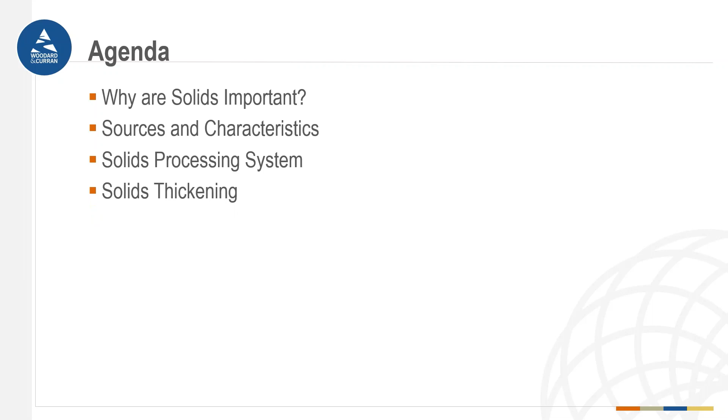So let's get started. The agenda for Module 1 is: first we're going to talk about why solids are important. We're going to talk about their sources and characteristics. We're going to talk about solids processing systems in general, and one specific part of the solids processing system, solids thickening.

So why are solids important? Wastewater treatment creates two things: clean water and solids, otherwise known as biosolids, residuals, or sludge. I may end up calling this all three of these things today, so these are all terms that mean the same thing. As long as wastewater is flowing to your plant, you're making solids, and you have to remove what you make.

Disposal of solids can be a major part of your annual operating expenses. And processing solids can be very O&M intensive and can be a big portion of how operators at your plant spend their time.

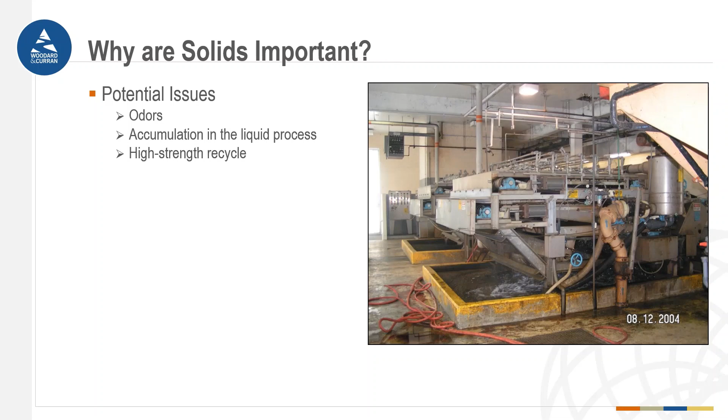Solids are also important because they can cause potential issues such as odors. If allowed to accumulate in the liquid process too much, they can cause process upsets. And if the solids processing system isn't working well, you can recycle solids and dissolved material back to the liquid process.

Because of these issues, solids can be the tail that wags the dog at your plant. Problems with your solids handling can cause problems on the liquid treatment side and even lead to permit violations.

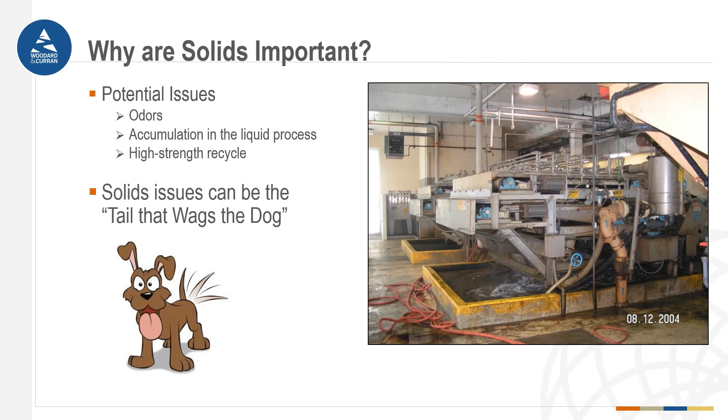In addition to being a potential source of issues, solids handling also presents an opportunity. It's one of the places where operators can make the most impact. Improvements to the solids handling process can simplify operations, save money, and even improve the liquid process.

And for operators who are feeling particularly creative and entrepreneurial, there are additional opportunities. Biosolids can be used as a fuel. It can be turned into a gas or pellets and burned. Solids can be digested to make heat and electricity. And solids can also be used as fertilizer and organic material for soil restoration.

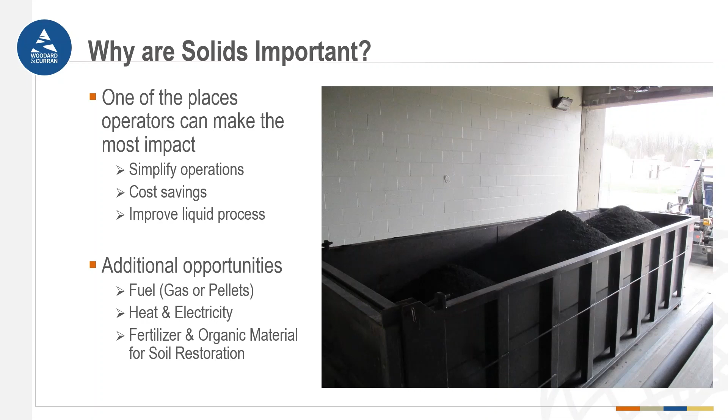Where do solids come from? Even though these things here look like UFOs, solids do not come from outer space. These are actually primary clarifiers, which is one possible source for solids.

Most plants also have secondary clarifiers, which is another source for solids. Solids can also come from your tertiary process if you have one. These solids can be metal salts that were added for phosphorus removal, or solids produced from effluent filters. And septage and hauled wastes can also be sources of solids.

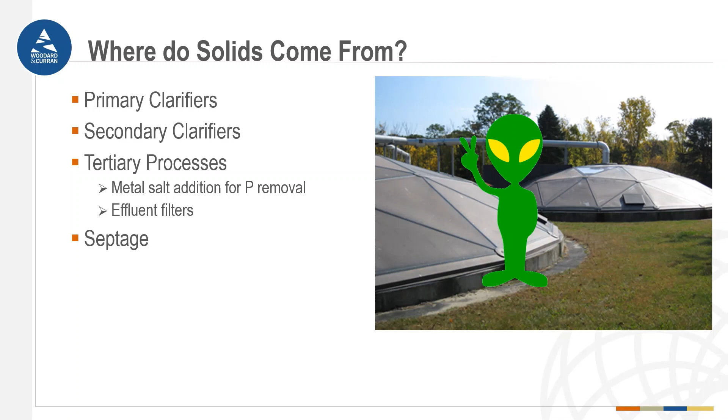The characteristics of solids depend on where they've come from. If your plant has primary clarifiers, the primary solids are typically 1 to 6% solids. They are the organic and inorganic material that's not removed by the headworks. It's relatively heavy, gritty, and potentially high BOD, and also contains fibrous material.

The secondary solids, on the other hand, are less dense. They're only about 0.5 to 1.5% solids. Secondary solids are the microorganisms grown in secondary treatment to remove BOD. They're cleaner, less odorous than primary solids. As I mentioned, they're lower density. They also tend to be biologically active, especially for plants with low SRTs.

Tertiary solids, if your plant has it, are very variable. As I mentioned before, these consist of metal salts. They can also be backwashed from effluent filters. Tertiary solids are typically poor settling and difficult to thicken and dewater.

Septage is typically 1.5%. Septage received from residential sources is usually cleaner than commercial, but use caution because depending on where your septage is coming from, it can contain rocks and other debris.

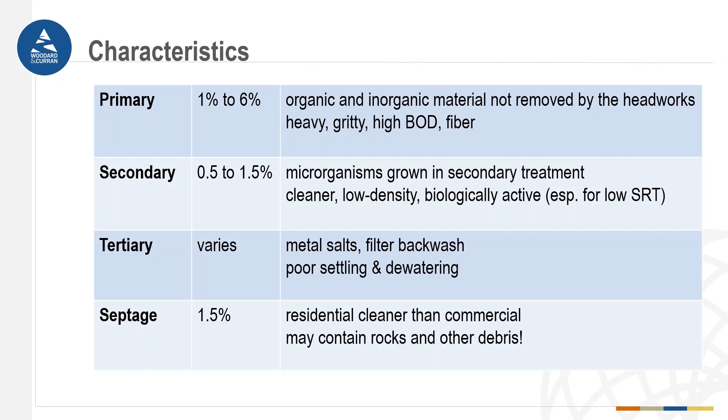For example, in Lowell, Massachusetts, at the Lowell Regional Wastewater Utility, they send their primary sludge to a cyclone degritter. In order for this to work, they have to pump at a high rate, so their primary sludge is relatively thin. By contrast, at smaller plants that don't have primary clarifiers, the material that would have ended up in the primary sludge ends up in the secondary sludge.

So the secondary sludge is relatively dense, and this is the case for a lot of small plants in Maine, including the plant at Madawaska, that don't have primary clarifiers. Different types of secondary processes also produce different secondary sludges. At Greater Augusta Utility District, for example, they use a high purity oxygen process.

And then sludges can be different too, depending on the point in the solids handling process. For example, at the Lewiston and Auburn plant, they have gravity thickeners, and the primary sludge is different going into the gravity thickener than it is coming out.

A few final points on characteristics to watch out for. Sludge, particularly primary sludge in a plant that doesn't have grit removal, or secondary sludge in a plant that doesn't have grit removal or primaries, can contain a lot of grit. That's what this picture shows, grit that was in primary sludge at a large plant with an old collection system and failing sewers. So a lot of that material ends up in the sewers and comes out in the primary sludge. And this grit is so large, it's almost gravel-like.

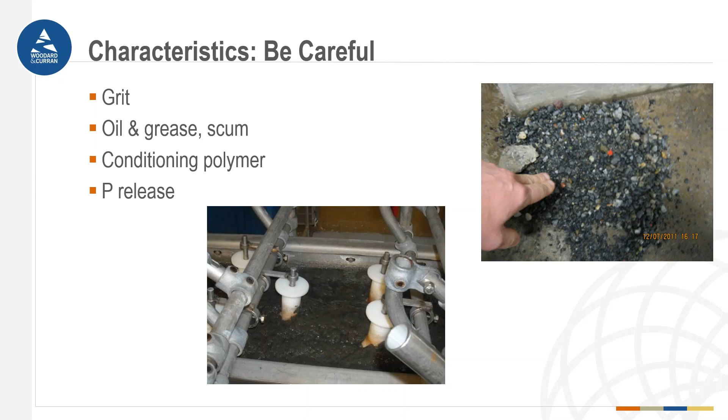Of course, it all starts with the source of the solids, either primary, secondary, or other solids, hauled waste or septage. Primary solids often undergo some kind of preliminary treatment to take out that grit. You can have grinders or screens. Secondary solids is often stored first, usually in some kind of aerated storage tank.

And then the first process that's applied to these is thickening. The goal of thickening is to remove water and increase your solids concentration to about 6%. By doing this, you greatly reduce the volume of the sludge that you're trying to process, so you can reduce the size of downstream equipment and reduce the amount of hauling that you've got to do.

Some plants have separate thickening for their primary and secondary sludges. In some plants, the secondary sludge is blended with the primary and they're thickened together. In small plants, thickening might be as far as your sludge handling system goes. At that point, you pump it onto a truck and it's sent off to ultimate disposal.

Some plants have additional steps, such as dewatering. The goal of dewatering is to remove even more water and concentrate your sludge up to 20 to 30% solids, reducing its volume even more.

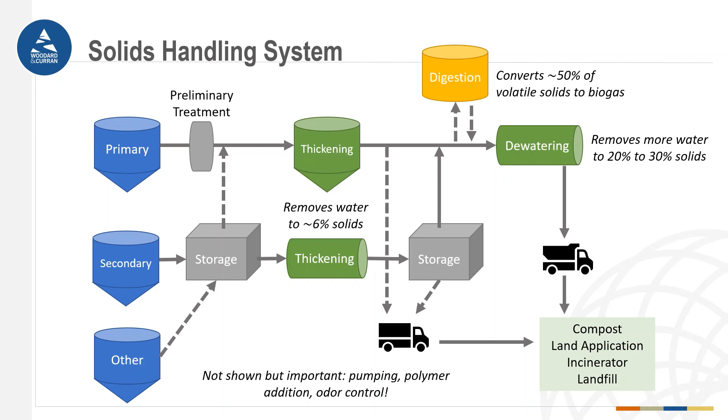One final point, I don't show pumps on this diagram just for simplicity, but pumping is a really important part of sludge handling that'll be talked about in a later module. Piping is also important, as is polymer addition and odor control.

Just briefly, I mentioned preliminary treatment on the previous slide as often the first process for handling primary sludge, basically taking out the debris, the grit, the stringy material that can be in that sludge.

The most common preliminary treatment step is grinding. This picture here is the kind of grinder that you might see on primary sludge piping. Some plants that don't have grit removal on their forward flow, particularly larger plants, the grit will end up in the primary sludge, so they actually have a grit removal system on the primary sludge. The benefit of this is the grit removal system can be smaller and the grit is more concentrated at this point.

Another preliminary treatment step, which isn't very common but does exist, is screening. This picture here shows inline screening of primary sludge.

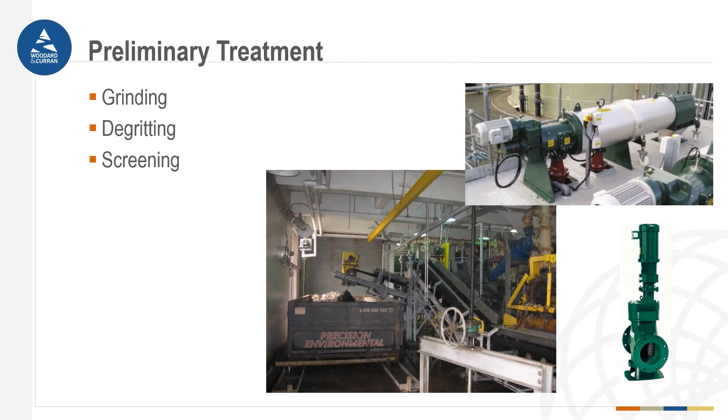I'm going to spend a little bit of time talking about thickening. This is a fairly important step. Most plants that handle sludge at least have thickening. The goal of thickening, again, is to remove water to reduce the volume of sludge.

For example, if your sludge is 2% and you can thicken it to 6%, you've reduced its volume by 3 times. That means you can truck only a third as much as you'd have to if you didn't thicken it. Thickening makes the sludge easier to store, haul, and process.

There are a number of common technologies used for thickening: gravity thickeners, rotary drum thickeners, gravity belt thickeners, dissolved air flotation thickeners, and centrifuges. I'll talk a little bit more about each of those now.

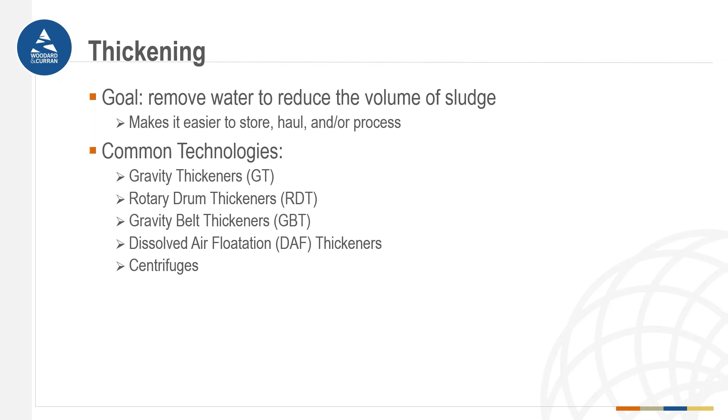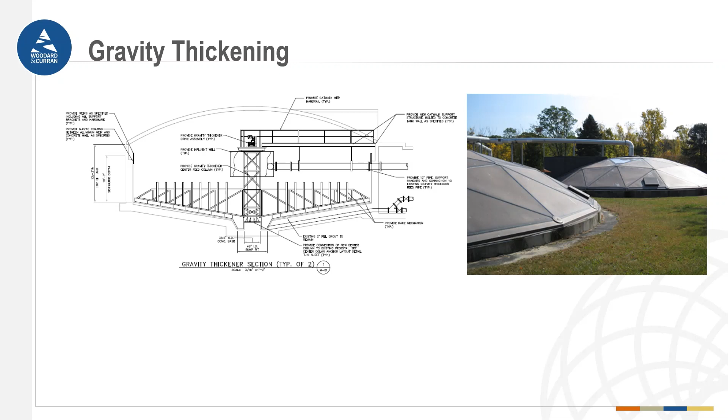Gravity thickening is perhaps the simplest process. Sludge is introduced into the center of a large tank, such as this, and it's just given time to settle out. The sludge concentrates on the bottom and clean water flows off the top. One thing to note is the slowly rotating sludge collection mechanism, which pushes sludge toward the center. It also has these tines or rakes, the purpose of which is to carve grooves in the mat of sludge.

Rotary drum thickening is another very common type of sludge thickening. It's also referred to as rotary screen or rotary sludge thickening, so you'll see RST as well. RST, RDT, all these terms mean exactly the same thing. Rotary drum thickening is common in smaller plants, especially plants that just have a single sludge.

Gravity belt thickening is similar in that it's another low speed, fairly easy to operate process. It's not as easy to enclose as a drum thickener, so these gravity belt thickeners can be a little bit messier and a little bit more odorous. The way these work is that the sludge is dumped on one end of the belt. These typically don't have a separate flocculation tank because the belt has a zone up front to allow flocculation to occur. The belt moves along slowly and is made out of a perforated mesh, so water drains through and the sludge is conveyed across the top.

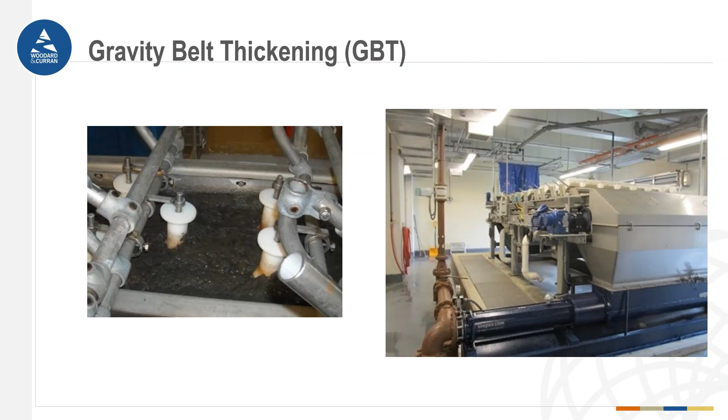Dissolved air flotation thickening is another type of thickening. It's a little less common in municipal plants. It's used for sludges that tend to want to float anyway—things like secondary sludge that's kind of neutrally buoyant, or secondary sludge mixed with scum that does tend to float. It's also common in industrial processes, especially food processing, where there may be a lot of grease involved.

The way this works is there's a recirculation pump, which recirculates liquid in the tank. It's a high pressure pump that pressurizes the liquid, and air is injected into that pressurized liquid. It's then introduced to the influent end of the DAF thickener. The pressure is released and it's mixed with the sludge.

They are sometimes used on a blend of primary and secondary sludge, but in this case they should be used with caution because the primary sludge contains a lot of BOD and the secondary sludge contains active microorganisms. When you mix those two things together, you get a lot of biological activity, which can lead to odors and basically can digest the sludge and release organic material back into your liquid stream, causing upsets.

Rotary drum thickeners are commonly used on secondary sludge or in plants with no primaries, where secondary sludge is essentially a blend of primary and secondary. As mentioned, they require flocculation and polymer. They're common in small plants with a single sludge, and it's a simple process that's easily enclosed.

Belt thickeners are similar in that they're typically used on secondary sludge or a blend. They're a mechanical process, so they require flocculation and polymer as well. They can be a little messier.

Dissolved air thickening is used on secondary sludges, also on a blend of secondary and scum. It's good for materials that tend to float anyway and contain scum and grease. They're large and complex and not really common in a municipal setting.

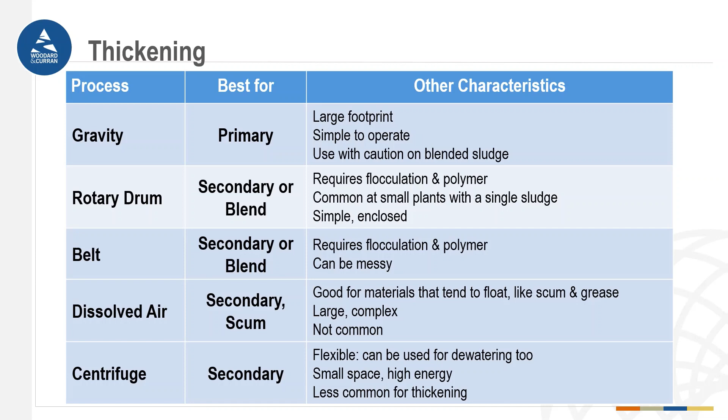The last slide of Module 1 that I want to go through is blending. In some plants that have multiple sludges, there are points in the process where the sludge needs to be blended. This is important ahead of thickening or dewatering to have a consistent sludge so that those processes run well.

The best way to do blending is in a blend tank. If you have the luxury of that at your plant, you send the two sludges to the blend tank, they're mixed with a mechanical mixer, and the blended sludge is pumped to thickening or dewatering.

Inline blending also works well. This is when the two sludges are just blended together within a pipe. Often a mixing valve is added to promote turbulence and mixing within the pipe, and this is typically how sludge is blended ahead of gravity thickeners.

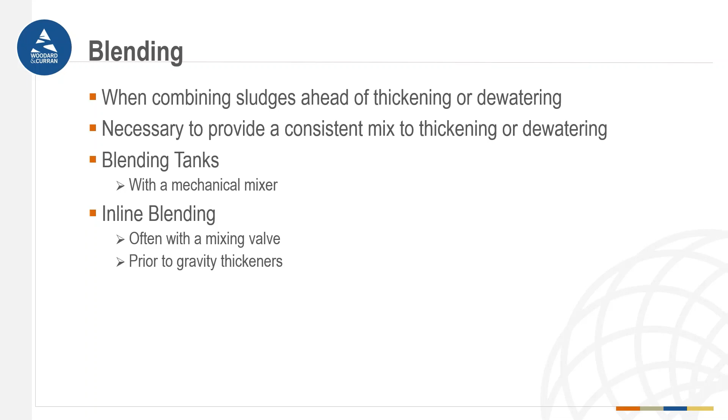That's the end of Module 1.

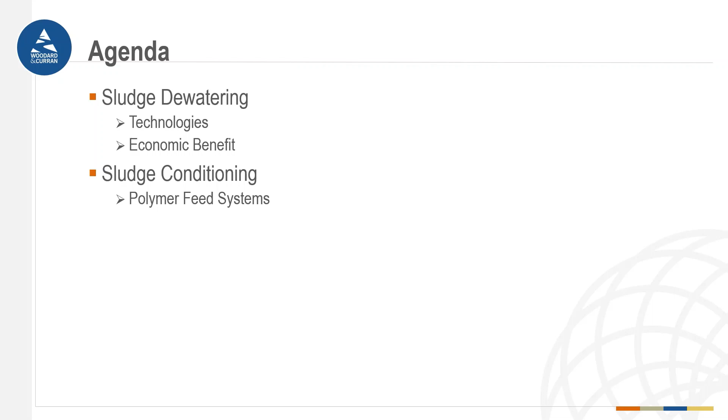Our first topic for this section is a discussion of sludge dewatering. The goal of both sludge thickening and sludge dewatering is to remove water from the sludge, because the more water you remove, the less weight you have to dispose of. The main difference between thickening and dewatering is that dewatering technologies remove more water than thickening technologies.

The first technology we'll go over is the screw press. This equipment is typically comprised of a screw that slowly rotates within a stationary screen basket. As the screw rotates, sludge travels along the screw and is pressed against the screen. Water passes through the screen and exits the bottom of the screw press as filtrate. The dewatered sludge is discharged from a chute at the end of the screw. Screw presses are enclosed within a solid housing to contain odors and splashing that may occur from the spray bar that's aimed at the screen.

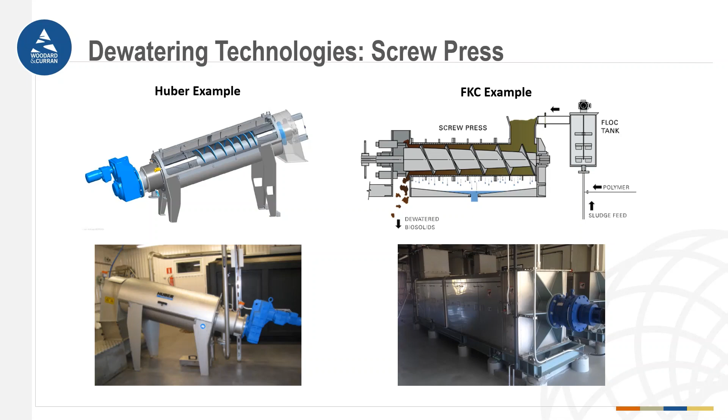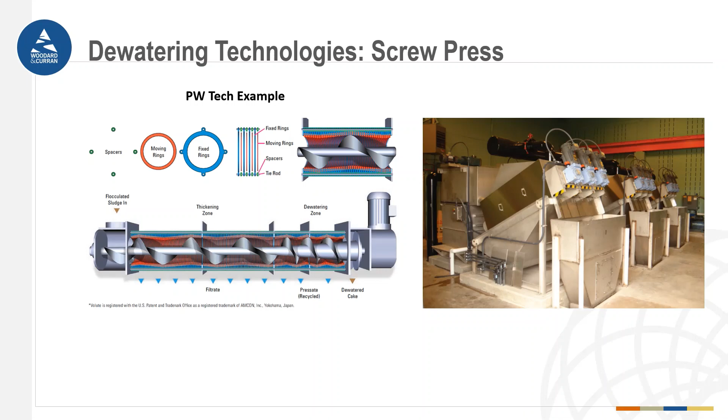This slide shows an example of 2 manufacturers that utilize this principle. This next slide shows an example of a manufacturer that has slightly modified the traditional screw press method. Instead of pressing the screw against a screen basket, PW Tech uses a series of rings around the screw that alternate between fixed rings and rings that are allowed to move up and down as the screw flights rotate.

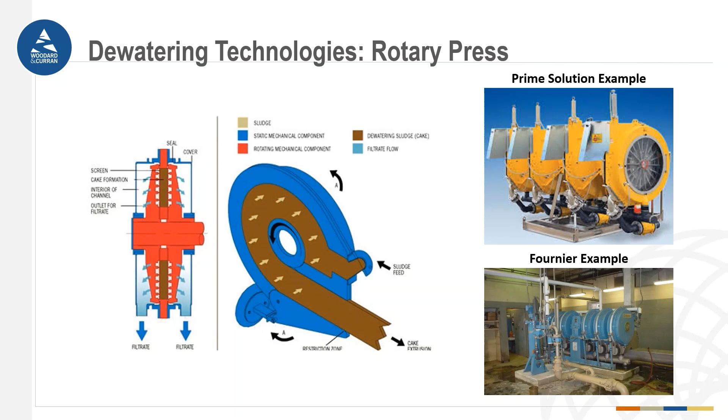The next technology is a rotary press, which consists of a modular series of filtration units. Each unit is composed of two parallel screen plates that rotate at a low speed. Sludge is fed into the space between the two plates. As the plates rotate, water is pressed out through the screens and the dewatered sludge is transported to the outlet. The sludge processing capacity of the rotary press can be increased by adding more filtration units. Similar to the screw press, each filtration unit is enclosed within a solid housing to contain odors and spray water.

The centrifuge might look similar to the screw press we just discussed, but the only real similarity is that they both utilize screws. In a centrifuge, the rotating screw is enclosed within a solid bowl that rotates at a very high speed. This causes the sludge to separate into a dense sludge cake and water. These units are also enclosed within a solid housing to capture odors and spray water.

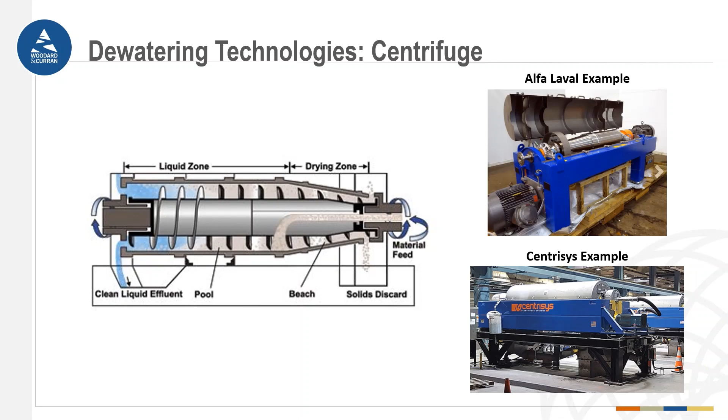Belt filter presses are a bit of a different animal. In this process, sludge is fed onto a porous belt where it's thickened slightly in what's called the gravity drainage zone. Pressure is then applied to the sludge from above by a second belt in the low pressure or wedge zone. Then in the high pressure zone, the top and bottom belts are passed around a series of rollers that squeeze additional water out of the sludge before the cake is discharged.

As you can see in these figures, belt filter presses can come in either a horizontal or a vertical configuration, and the capacity of these units can be increased by just increasing the length of the belt system. Unlike any of the previous three technologies, these units are not enclosed within a housing and are often installed within a dedicated room to contain odors and spray water.

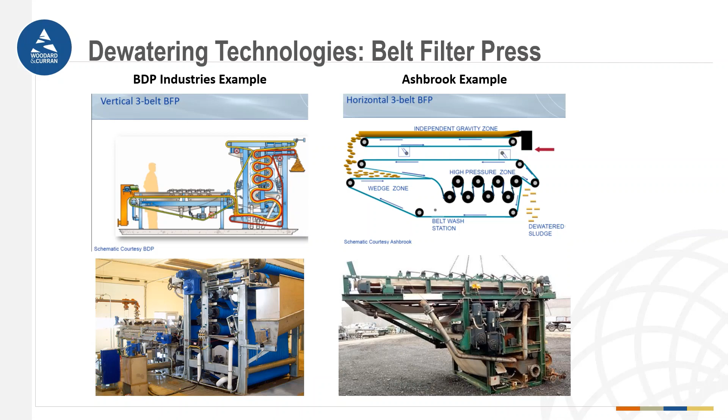On the other hand, the belt filter press is not enclosed, which can create a messy working environment if a separate room or containment area is not included in the design. In terms of electric requirement, the screw press, rotary press, and belt filter press all operate at relatively low speeds and therefore require smaller motors. But the high-speed operation and multiple motors of the centrifuge result in a higher power requirement.

The centrifuge also tends to require a higher polymer dose than the other technologies, which results in a higher overall operating cost when combined with the electrical requirements. However, both the centrifuge and belt press can provide a higher sludge throughput per unit area footprint than the other two, and both are capable of dewatering waste-activated sludge on its own, whereas the screw press and rotary press tend to perform poorly unless the sludge feed consists of a blend of both primary and waste-activated sludge. As you can see, there's really no one technology that will be the answer to every facility's dewatering needs.

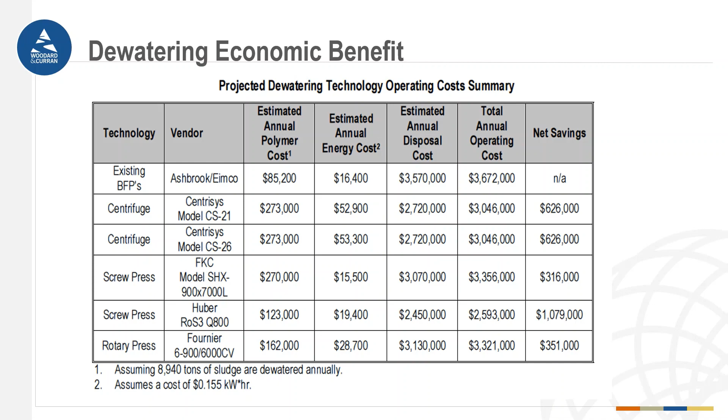In this example, all three of the other technologies would require a higher polymer dose than the existing belt filter presses, but all three would also result in a significantly lower sludge disposal cost because the belt filter press typically doesn't produce as dry of a cake as the others do. The end result of this particular comparison is that replacement of the existing belt filter presses with a Huber screw press would actually result in the greatest operational cost savings.

We're going to continue with the operational cost discussion and zoom in a little closer on the dewatered cake disposal component. As you can see on this example graph, the dewatered sludge volume in wet tons per day that needs to be disposed of decreases exponentially with the dry solids content of the sludge.

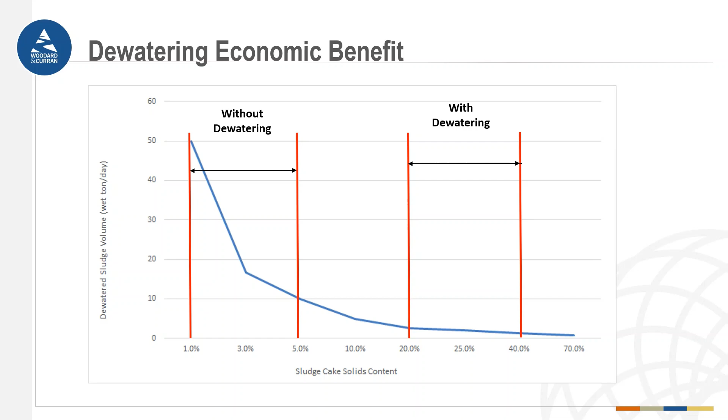Sludge thickening typically results in a cake between 1 and 5% solids, whereas sludge dewatering typically results in a sludge cake between 20 and 40% solids. This means that the sludge volume produced by a dewatering system can be several times lower than that produced by a thickening system alone.

As an example, this next figure shows how about 96,000 gallons of sludge thickened to a solids content of 5% equates to 400 wet tons per day that someone then has to haul away and therefore pay to have hauled away. This is approximately 16 25-ton truckloads per day. If this sludge is then dewatered to a solids content of 20%, the result is just 100 wet tons generated per day, or approximately 4 truckloads.

By contrast, if that same 400 wet tons of 5% thickened sludge is dewatered to a solids content of 30%, only 67 wet tons is generated per day. So that extra 10% solids content in the dewatered sludge represents a savings of a whole truckload of sludge hauled each day over the previous example. You can clearly see how the savings will start to accumulate over just the first year of operation of a dewatering system.

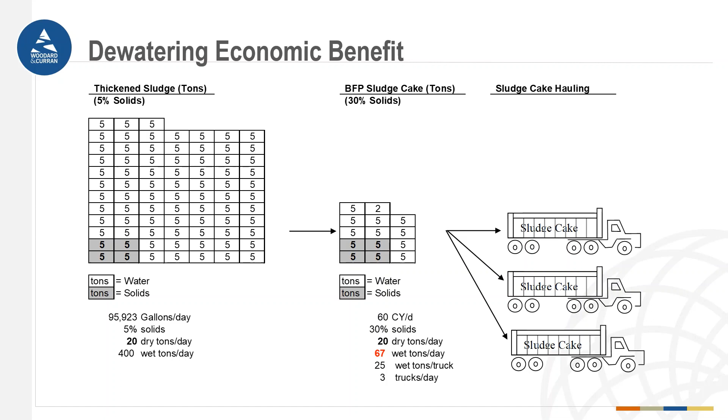At this point, we're going to switch gears a little bit and talk about polymer. I've mentioned polymer several times throughout the module as a substance that is added to the sludge prior to it being fed into the dewatering equipment. The word polymer is a general term that refers to long chains of sticky molecules that bind sludge particles together to form a floc. This makes it easier for the dewatering equipment to effectively separate the solid particles from the liquid water. Sludge primarily has a negative charge, so positively charged or cationic polymers are typically used for flocculation.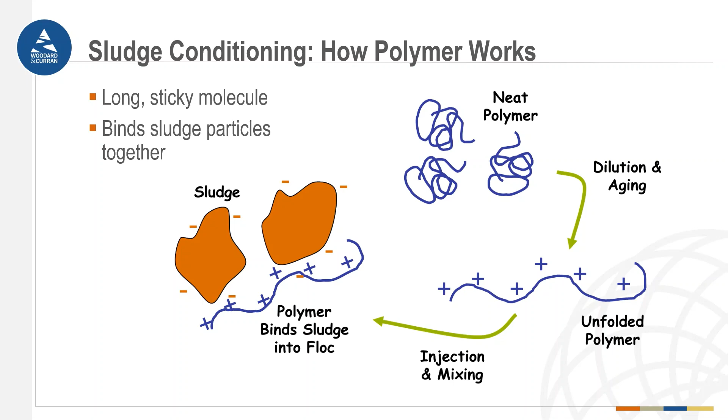There are many different types of polymer available that are based on parameters such as molecular weight, charge density, and percent active content. The first step in designing a polymer feed system is to select a polymer that will result in the highest percent solids in your dewatered cake sludge.

This is typically done by performing a jar test, which allows a side-by-side comparison of how well different polymers form flocs within a mixed sludge sample. The dewatering equipment vendor can also typically perform bench-scale lab testing to determine which polymer will work best with their specific equipment. However, even with a recommendation from the lab, it may be necessary during initial startup of the dewatering equipment to try several different types of polymer before the final selection is made.

The operator can then vary parameters such as makedown concentration and dose to fine-tune how the polymer feed system is ultimately run.

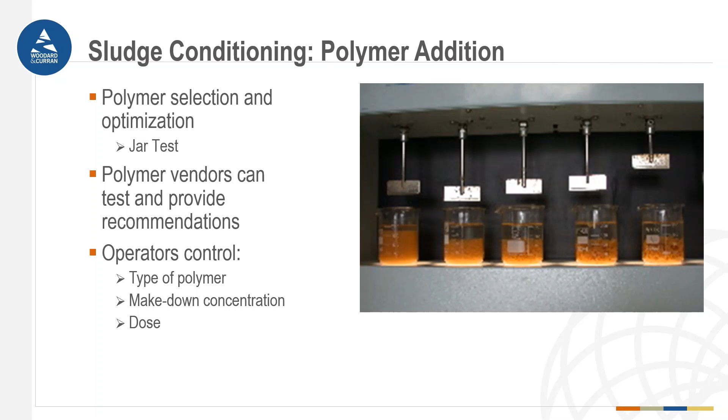The addition of polymer is necessary for all thickening and dewatering technologies. In general, the thickening and dewatering processes often require two different types of polymer, but it's possible at some facilities to actually use the same polymer for both processes. It is therefore recommended that the dewatering polymer be tested on thickened sludge that has had its own polymer added to it already to accurately reflect field conditions. It's also therefore typically necessary to install two separate polymer storage, makedown, and delivery systems.

Design of a polymer feed system begins with the anticipated polymer dose. As I've already mentioned, the exact polymer dose will not be known until the equipment is operational. So this estimated dose is calculated based on the typical range of polymer volume and concentration that depends on the type of dewatering equipment and the type of sludge cake. In reality, the polymer dose will vary based on sludge quality and other impacts such as wet weather and seasonal variation.

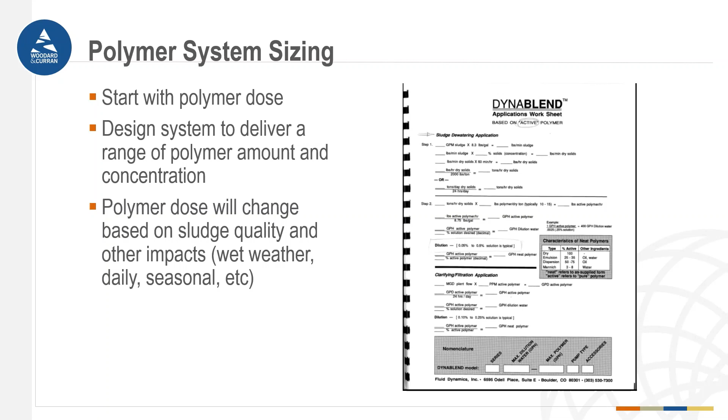This figure provides an example of a facility that requires different polymer feed systems for thickening and dewatering. Each system requires its own bulk storage tank, mixing pump, blending unit, aging tank, polymer pumps, and injection system.

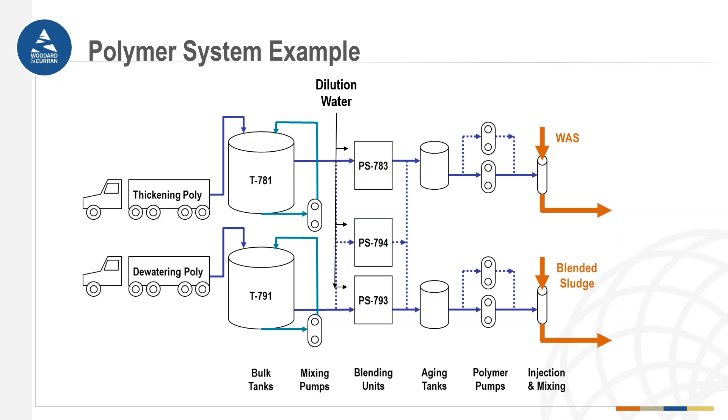This last slide shows just a few photos of the polymer system at the LAWPCA facility where this training was originally scheduled to be held. Although polymer is chemically inert and non-corrosive, there are containment curbs around the storage and feed system areas to prevent spills, since polymer is a very slippery compound that can lead to operator slips and falls.

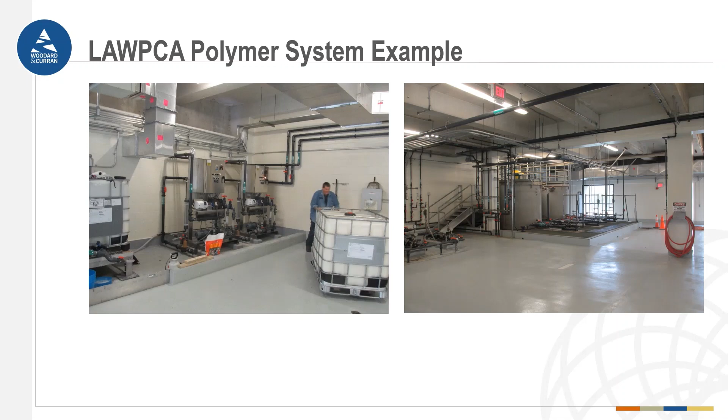Thank you very much, Julianne. Now we're going to start Module 3 of Introduction to Wastewater Solids Handling. My name is Tom Harrer. I'm a project engineer at Woodard & Curran with about 10 years experience in wastewater and water treatment design. So in this module, we'll be talking about sludge storage, pumping, and conveyance.

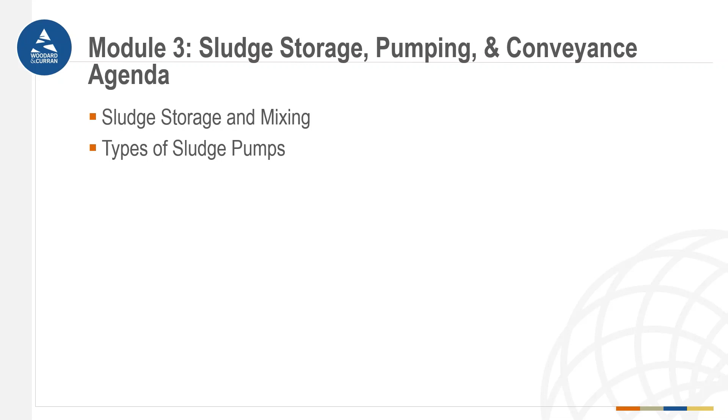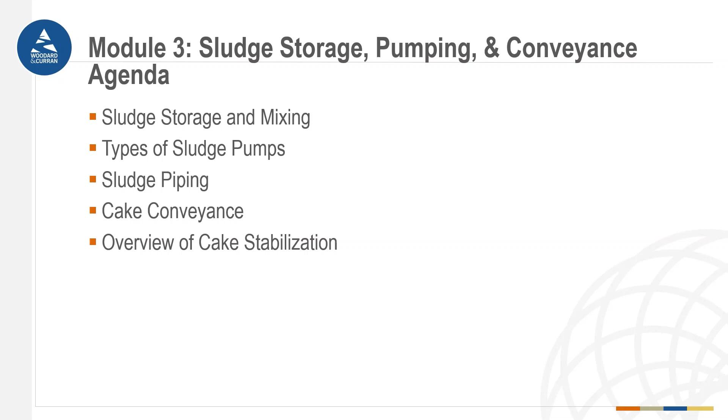First, we'll talk about sludge storage and mixing. Next, we'll talk about types of sludge pumps. Next, we'll talk about sludge piping. Then we'll talk about cake conveyance. And lastly, we'll touch on an overview of cake stabilization.

The first topic is sludge storage. So the first thing to mention is sludge storage in the clarifiers, either primary or secondary, is not desired and is typically only used in emergency circumstances. For that reason, storage of liquid sludge is usually an aspect of the sludge handling design.

So one way of dealing with this is storing sludge in gravity thickeners. This is generally good in smaller scale facilities, and they can get away with just storing all the sludge in a gravity thickener. But as the facility size grows, there's more of a need to store the sludge in an alternate location.

So the preferred way is storing thickened sludge, and the reason for this is it takes up less space, so you can build less tank volume. But one consideration with this: it's generally not a good idea to mix primary sludge and waste activated sludge.

You can store dewatered sludge, but this is not common. It does take up the least amount of space, but it has issues with handling. Therefore, it's not commonly seen.

The last consideration, an overall consideration for any storage system, is incorporating mixing, aeration, and odor control. Touching on mixing for sludge storage tanks or blend tanks, it's a good reason to mix your sludge. If you're blending your sludge sources together, it helps create a more homogenized sludge mixture. In general, whether you're blending or not, mixing helps reduce or eliminate stratification or separation of your sludge. It also allows grit particles or inorganic particles to stay suspended without settling to the bottom of the tank. Lastly, mixing the sludge helps reduce septicity or stagnation, which can lead to odor issues as well as issues with your thickening process.

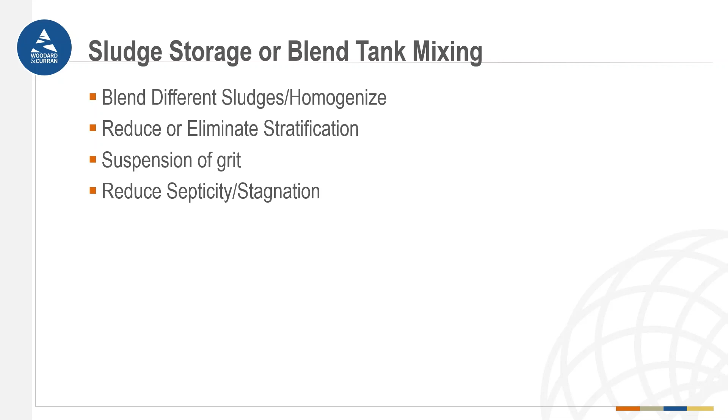One of the leading manufacturers is a company called Invent. They're a pretty popular mixer; you see them in a lot of plants.

Another way of mixing is to pump the sludge. With this, you draw directly from the tank and pump it right back into the tank through flow nozzles that shoot the sludge out at high velocity. This creates a mixing effect by pumping the sludge around and shooting it at high velocities. Another way of mixing is with draft tubes, using either recirculated gases or mechanical means.

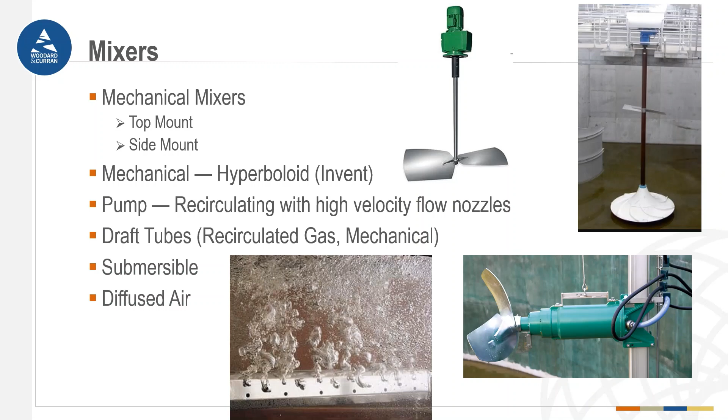Another type of mixer is a submersible mixer, shown on the bottom right, that green mixer, which is fully submerged in the tank. Lastly, there's diffused air, shown in the photo at the bottom. This is where you pump air into your tanks through a diffuser system, either coarse bubble or fine bubble, to mix up your sludge.

On this slide, the photo on the left is another example of a hyperboloid mixer. The photo on the right shows a Rotamix system, which is a type of sludge pumping mix system.

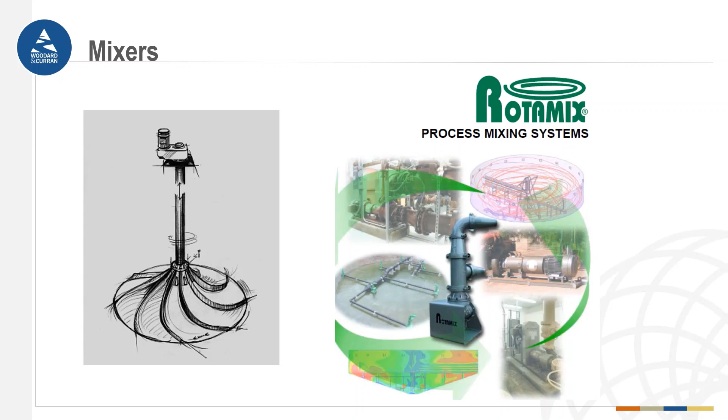Here's a quick example of cake storage. The cake is conveyed up into hoppers sitting right above the dumpsters. The cake sits in there and gets loaded into the dumpsters and conveyed offsite.

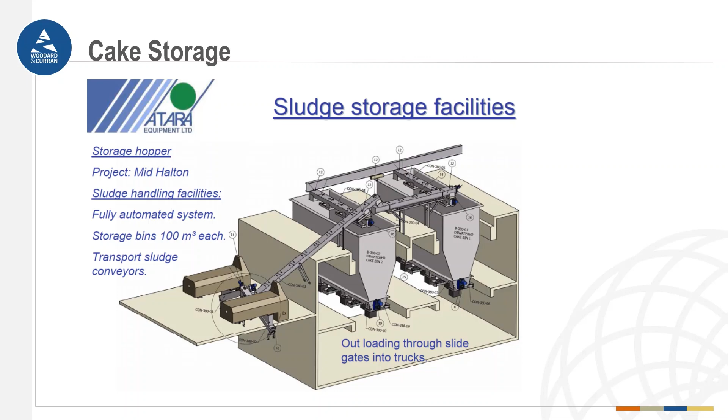Next we're going to talk about sludge pumping. There are a bunch of different types of pumps used for sludge pumping. On the screen we have a couple examples. On the left, you have double disc pumps; both the top and bottom photos depict a double disc pump. One common manufacturer is Penn Valley, so sometimes you hear Penn Valley pumps and double disc pumps used synonymously.

The photo in the middle is a rotary lobe pump, where lobes actually move the fluid around. The photos on the right depict two different types of centrifugal pumps. One is a chopper pump, shown on top, which has a cutter blade that cuts up any material in the fluid, like rags in the sludge, allowing it to be pumped without clogging the impeller. The one on the bottom is a recessed or vortex impeller pump, where the impeller sits recessed outside the volute, allowing big chunks of solid material to pass freely through the pump without getting bound up on the impeller.

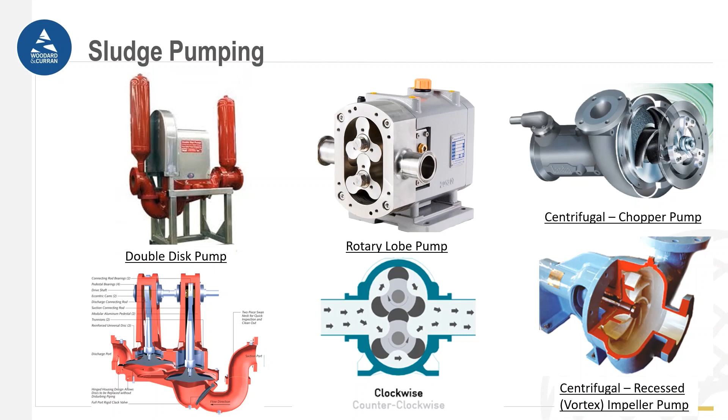A couple more examples of sludge pumps: on the top left, we have a peristaltic or hose pump. The photo on the bottom details a progressive cavity pump.

The photo on the top right shows a piston pump, and the one on the bottom right shows a diaphragm pump. All the different styles of pumps have their pluses and minuses. One thing definitely to consider is the suction lift capacities, because certain pumps have more limitations on your suction lift capabilities. So in selecting the pump, that's an important consideration.

Another consideration is providing overpressure protection for positive displacement style pumps. These are the pumps you can see on the table below: rotary lobe, progressive cavity, double disc, peristaltic, diaphragm, and piston pumps. All of these are positive displacement style pumps, and they will just pump and pump and pump.

One big issue with sludge is you can get clogs in your piping. If your pipeline gets clogged up, the PD pumps are just going to pump and blow your piping apart. So it's important to design in some overpressure protection to shut off the pump if the discharge pressure gets too high. Looking at this table, it details what pump is best for different types of applications. Green is good, yellow's okay, and red's not recommended. Depending on what type of sludge you're pumping, there's different pluses and minuses for choosing different types of pumps.

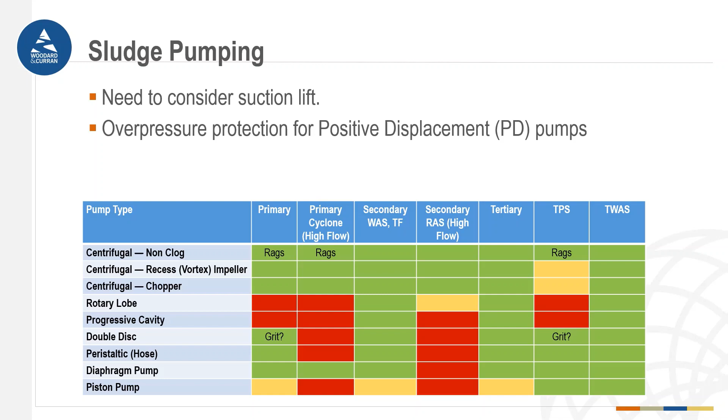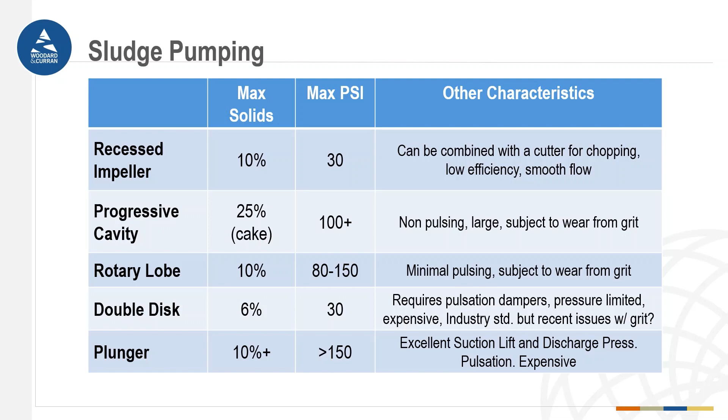Looking more into pump selection, a couple important characteristics are what percent solids you're actually pumping and your discharge conditions. Depending on what you're pumping, there's certain limitations to the type of pump you want to select. For example, if you're pumping really dry sludge cake, you want to select something like a progressive cavity pump because it can pump up to about 25% solids.

Next, I want to touch on some special considerations for sludge piping and pump selection. The important thing to realize is that sludge doesn't act like water. The sludge TDH, or total dynamic head, can be many times that of water. Water is a Newtonian fluid, meaning the head loss or pressure drop is proportional to the velocity or viscosity of the fluid. Sludge doesn't act like that—it can be exponential.

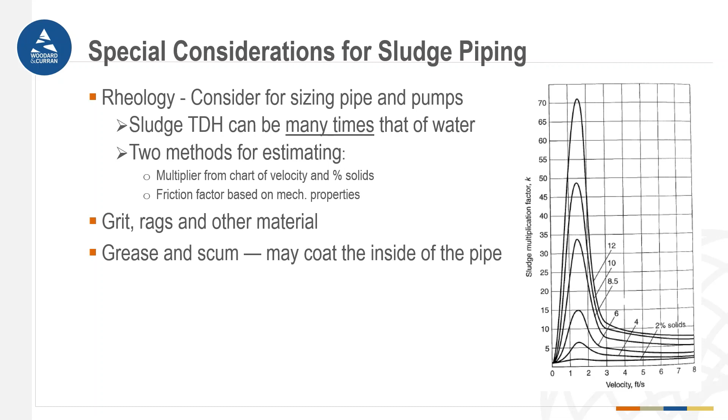Some other considerations to take into account are grits, rags, and other materials that will be in your sludge that can clog up and gum up your piping and pumps, and also grease and scum that may coat the inside of the pipes.

Now we're going to talk about some considerations for your piping. An important thing with sludge piping is having an ability to clean it out. There are a bunch of different ways you can clean out your piping. One is just adding a flushing connection—putting a location in the piping where you can hook up a water line, either plant water or city water, to flush the line out.

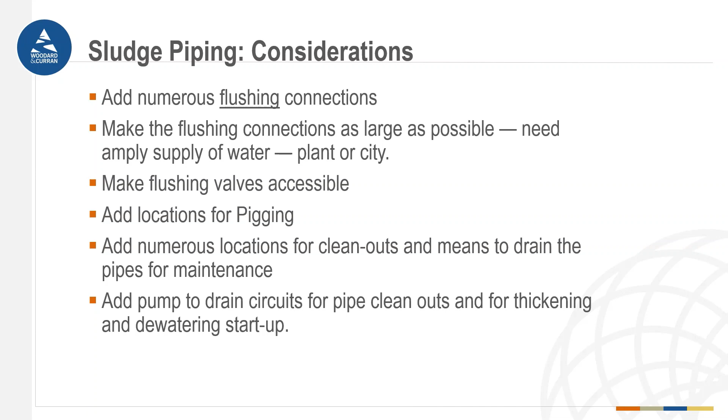Make sure the connection is actually big enough so you can push a lot of water through it, and make sure the flushing valves are accessible so you can get to them. Another way to clean out your lines is adding pigging stations, where you pass something solid through the pipe to push things out. Another way is putting clean-outs in there so you can physically clean out portions of the line. And another way is to add a pump to just pump out the line.

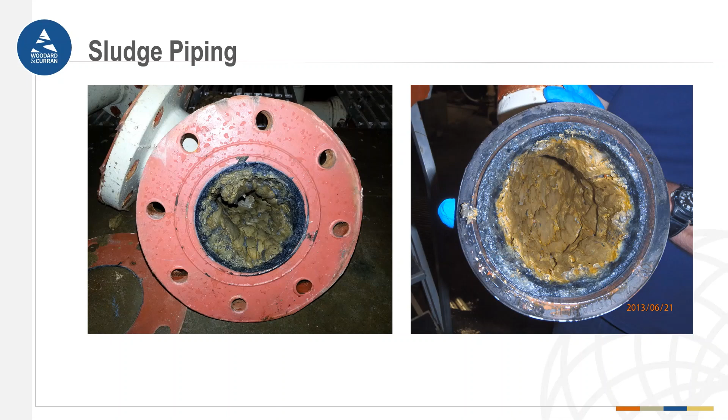So this is the reason why you've got to add those means of cleaning the lines. You can see these pictures of pipes just absolutely clogged up. So you want to figure out some way of avoiding this at all costs and making sure you're maintaining your lines so they do not look like this.

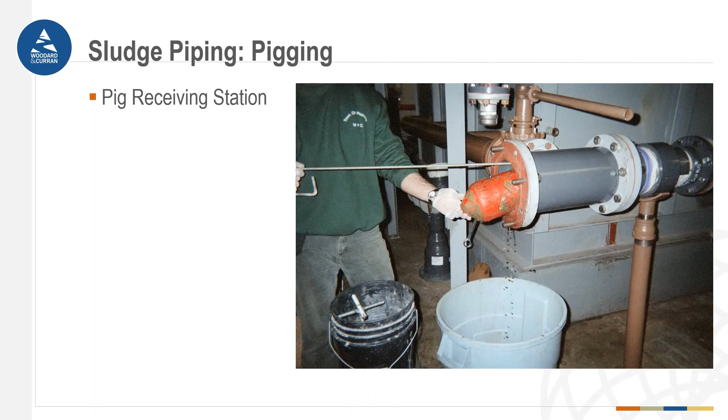Touching now on some considerations for selection of actual piping. Looking at material selections, one really good material you can select is ductile iron. One thing to consider is getting a lined piece of ductile iron, with either cement lining, plastic or epoxy lining, or glass lining. Also, PVC is a good option, but note this is only really good for low pressure applications. For connecting the pipe, you want flanged or groove end ductile iron pipe.

This is so you can actually break the thing apart in case you have any clogging. Similarly with PVC, you don't want solvent welded PVC. You want to add some flanges so you can disassemble it. When it gets to actually installing the piping, you want to make sure you have plenty of hangers for dealing with the potential of overpressurization and just the beastly nature of pumping sludge. The last thing I want to highlight is it's recommended that you have a minimum diameter of 6 inches for any sludge pipe.

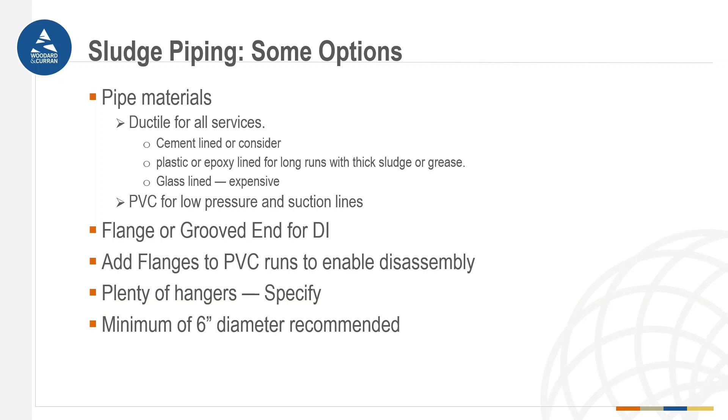This slide shows a couple examples of some of the connections. The photo on the top left shows a ductile iron grooved fitting or Victaulic compression fitting. You can see that elbow over to the right, the silver one. And then you can see some pictures of the PVC with some flanges on there.

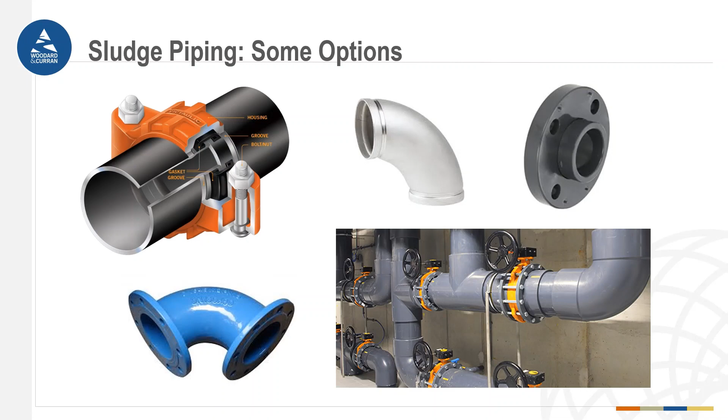Some further considerations in piping as you're putting the piping system together: one thing is just designing to minimize the amount of bends you're putting in there. And if you are going to use a bend, try to use a long radius bend when possible.

Next is installing your valving. You do not want to put your valves in the vertical position. This is because you can get the sludge to sit on top of the valve and gum it up. So ideally you want them in the horizontal position. Also, tied with your piping, use sanitary wyes when possible to provide cleanouts and pig launching and receiving stations.

Another consideration is avoiding suction manifolds when possible. And tied with your suction piping is keeping your suction piping as straight as possible. We know with retrofits you can't get all these things, so just do the best you can with what you got.

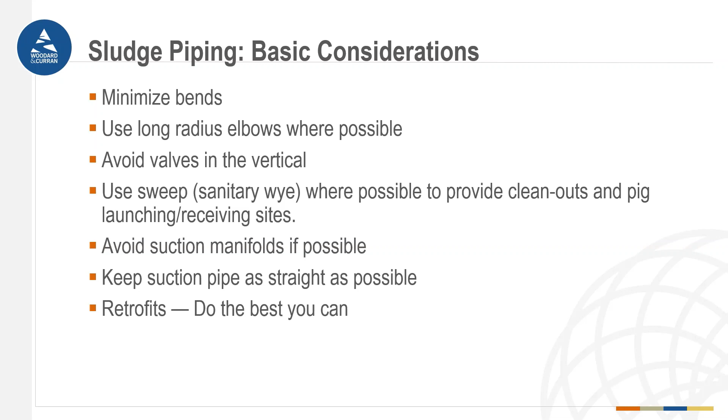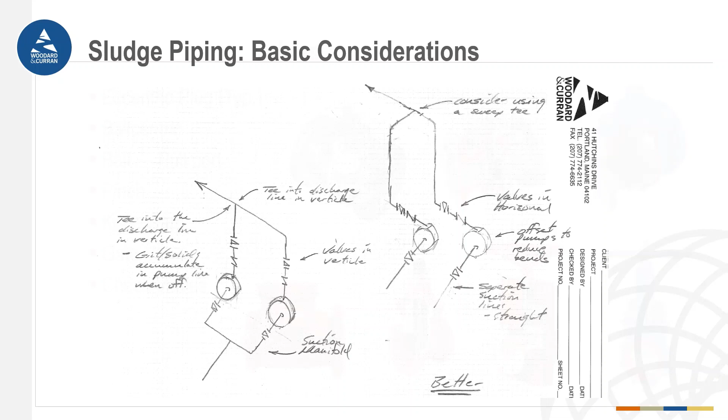Touching right here on ball-centric plug valves, these are a really good option, but some considerations: trying to avoid them with sludges containing grit, and orientation matters. As mentioned before, don't install it in the vertical position, install it in the horizontal position, in the correct manner to prevent solids accumulation.

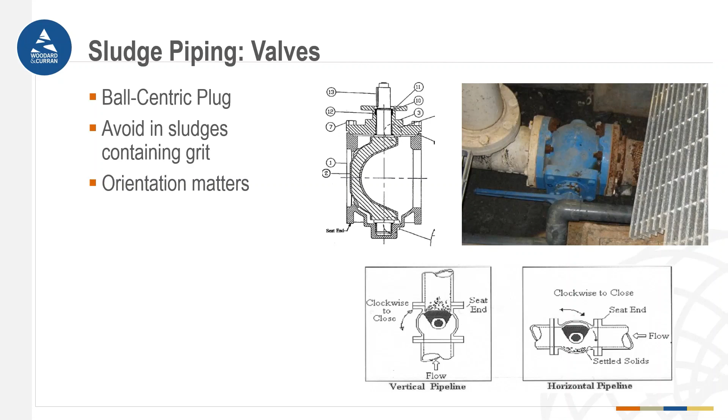Here's just a quick example of some sludge piping. This is a pretty good arrangement here. You can see the valves installed in the horizontal position. You've got flange piping as well as some compression fittings.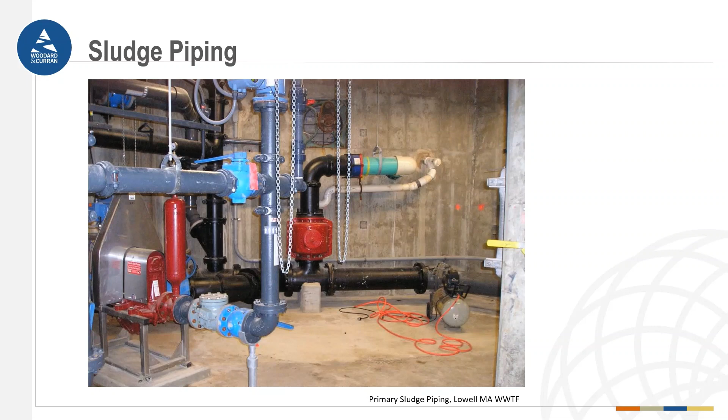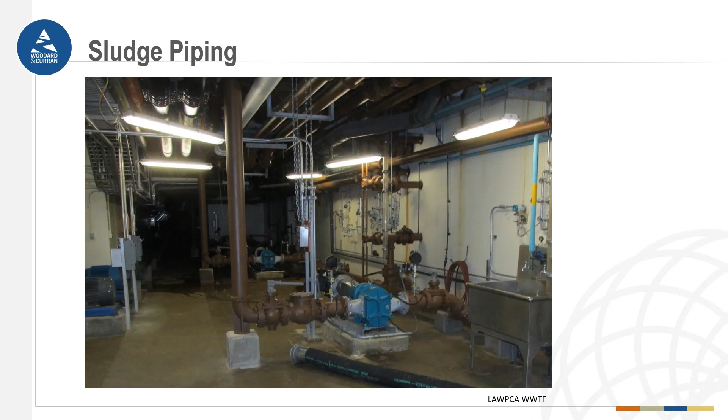Here's another look, this is actually a LAWPCA. Another good layout - again, you have your valves installed in the horizontal position.

So next we're going to touch on sludge cake conveyance. As I mentioned previously when talking about the pumps, certain pumps work better for drier sludge cake. Two examples are progressive cavity pumps, as well as high pressure piston pumps, which can pump pretty dry.

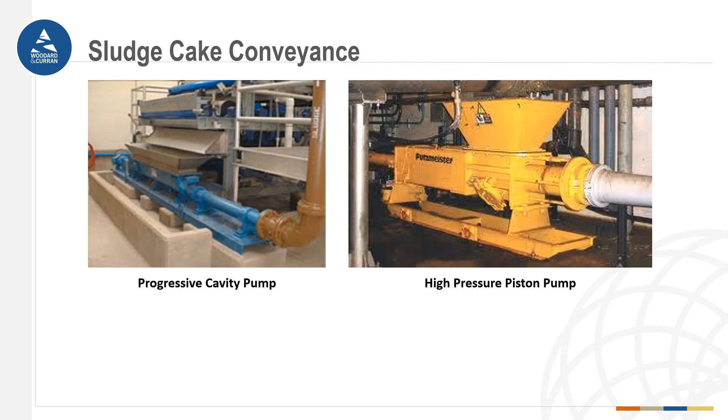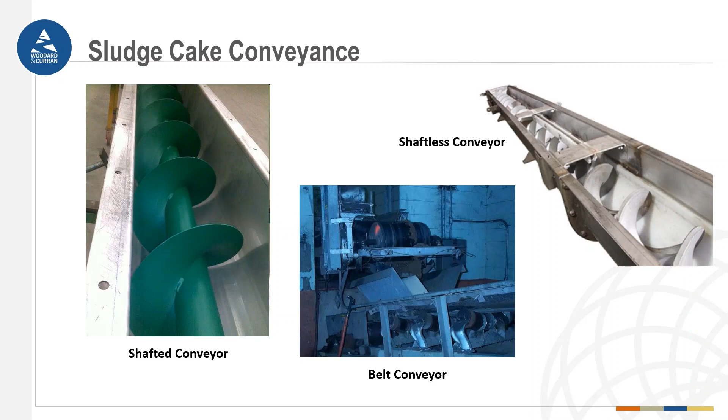Moving on from pumping to actually moving the cake around, there are a couple different options: shafted conveyors, belt conveyors, as well as shaftless conveyors. Here's a picture of Spirac, a manufacturer that produces a lot of conveying equipment, particularly shaftless screw conveyors.

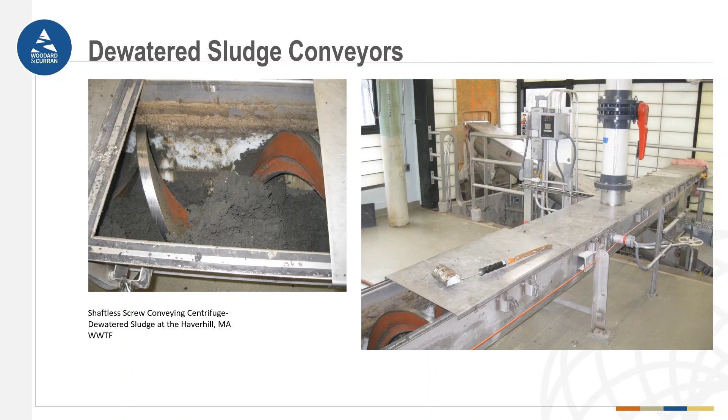Here's a couple pictures of some sludge conveyors. This is a shaftless sludge conveyor at the Haverhill, Massachusetts wastewater plant.

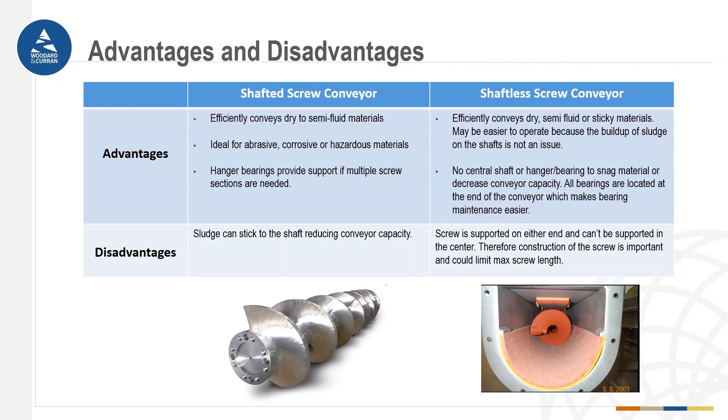Touching on advantages and disadvantages of shafted versus shaftless screw conveyors. Both are good options for conveying dry and semi-fluid materials, but the big advantage with the shaftless screw conveyor is there's no shaft, so no sludge can stick to it and reduce conveyor capacity, and the bearings are located at the end of the conveyor, making maintenance easier. The drawback is there's a limit to how big a shaftless conveyor can be, so the advantage of the shafted screw conveyor is you can make a much longer conveyor if needed.

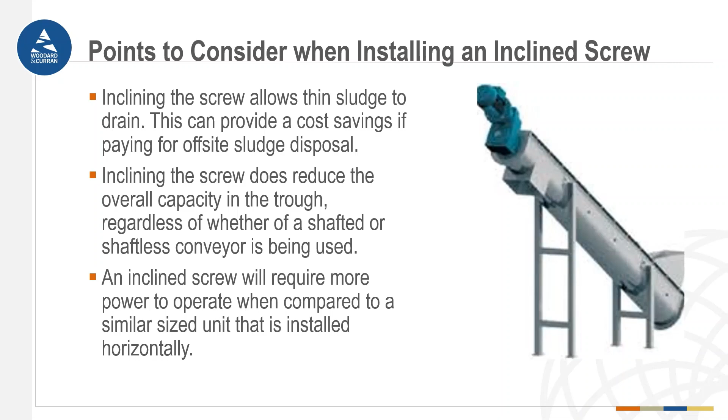There are different orientations you can install a screw conveyor at. One is an incline screw conveyor. The big advantage is that installing the screw at an incline allows thin sludge to drain more, which can provide cost savings if you're paying for off-site disposal. But drawbacks include reduced capacity with an inclined screw, regardless if it's shafted or shaftless, just due to the orientation, as well as requiring more power compared to a horizontal screw of the same size.

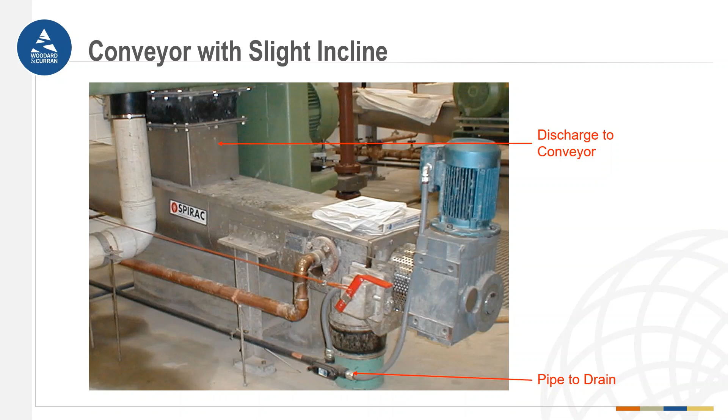Here's another example of an incline conveyor, coupled with a centrifuge. You can see the centrifuge over to the left, the blue thing, with the incline conveyor dumping over to a dumpster on the right.

One thing to highlight here is this conveyor is provided with an emergency pull cord. This is a good provision to have with conveyors, so you can shut them off in case someone gets a piece of clothing, their hand, or something trapped in the conveyor. You have a way to immediately shut off the piece of machinery right then and there.

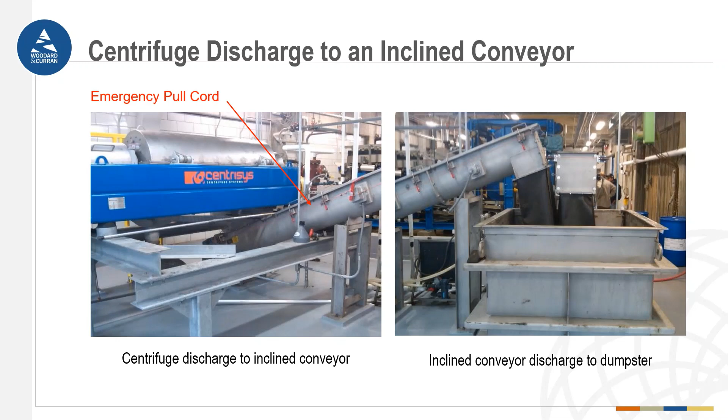Getting to the end of the line, when you're dumping your sludge into your dumpster, there are some considerations for your conveyor setup in your truck bay or wherever your sludge discharges for hauling off site. In the photo on the right, this conveyor is set up with multiple discharge points. This allows the sludge to be evenly dispersed over the dumpster instead of piling up in a single location, which would require you to constantly move your sludge can back and forth to get even dispersal.

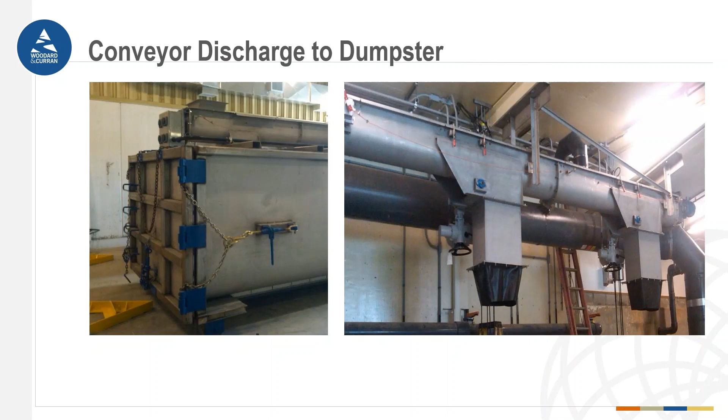Here's a good example of a truck loading bay in Niagara, New York. You can see the conveyor setup has a bunch of points for discharging the sludge into that dumpster.

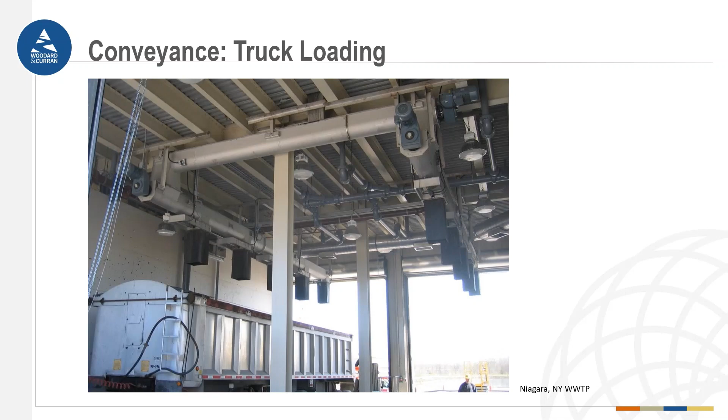Here we have the truck loading bay over at LAWPCA. In the photo on the right, you have two discharge locations dumping into the dumpster, giving two nice piles of sludge. You can imagine if there was just one discharge point, you'd get this huge amount of sludge in one spot, which is just a pain to deal with when filling up your dumpster.

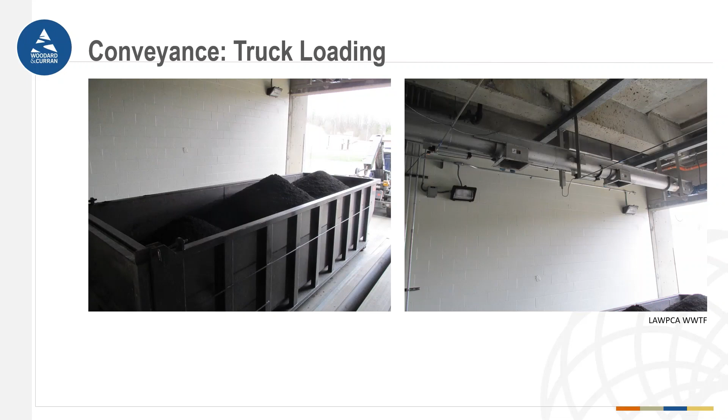The last topic I want to touch on is sludge cake stabilization. The reasons for sludge cake stabilization are to reduce pathogens, eliminate odors, and inhibit or reduce putrefaction of the sludge cake. Some common stabilization methods are addition of lime, either post or pre-treatment, heat treatment, and anaerobic digestion.